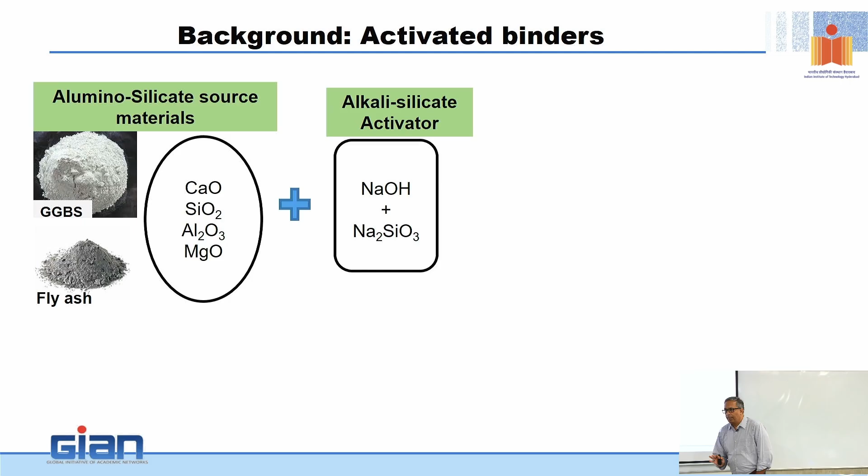Now, what is the outcome of this process? Well, if I use either a fly ash or a slag, I would form one of these two binders here - that is calcium aluminosilicate hydrate or sodium aluminosilicate.

It's not a hydrate, it's a misnomer. But somehow this name NASH has stuck because of a fortunate or an unfortunate accident that happened in a committee. And that name has since persisted.

So, but at the outset, I want to clarify one thing. People use this term geopolymers rather loosely. Now, what are geopolymers? Geopolymers, by the strictest definition, are these sodium aluminosilicates. Now, when you start forming calcium aluminosilicate, when does calcium aluminosilicate hydrate or CASH form?

When you start with a calcium-rich source, like say GGBS, and you were to alkali activate it, what you may form is a CASH. Now CASH is like a distant cousin of CSH. Therefore calling it a geopolymer is a misnomer, right?

So please be careful. And I know people use it colloquially and it's rather a catchy word. So everybody throws around the term geopolymer, but not all alkali activated materials produce geopolymers. Now, if you really want a geopolymer, you should basically drop a source that has calcium in it. You go with a calcium deficient source.

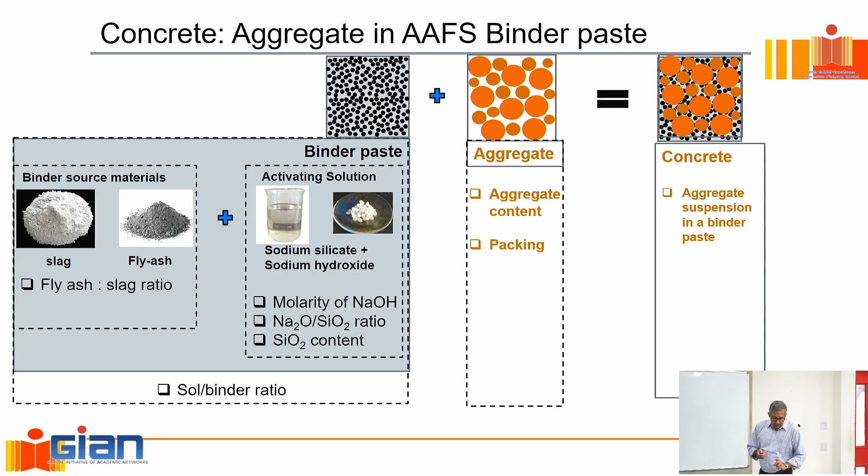Now, the first thing is, why do we add this sodium silicate, and what does it bring into the picture? Well, if you look at fly ash and slag, these are my source materials - they're bringing in silica, but there's not adequate silica, so to supplement it, I add sodium silicate. Now, what happens when I increase the silicate content? Silicate content is the amount of silica present in the solution made up of these two.

If I increase the silica content, typically my strength starts shooting up because I'm bringing in more silica that helps formation of either C-A-S-H or N-A-S-H, and that leads to strength improvement. So having silica in the solution is almost a must if you really want good strength from the material. Only in rare cases where we are dealing with only slag do we sometimes drop sodium silicate. Otherwise, typically almost always you'll have to have that.

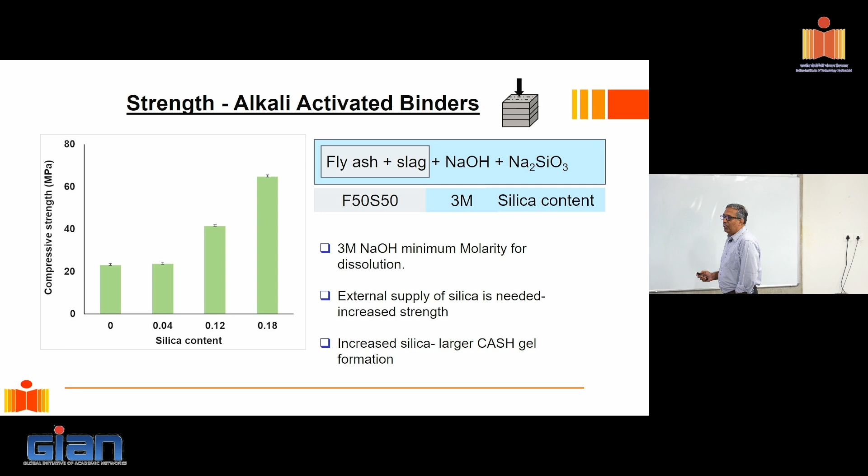And when you do that, this proportion of these two matters - how much water I add controls the molarity, and the percentage weight of this to these two is another variable that I have to worry about.

Now, coming to the rheology, going back to the basics again. If we do the rheology, we'll stick to the standard test, a constant shear rate test - and yesterday you saw how to measure thixotropy. What we would do is basically do a ramp up, so we are ramping up in strain rate, hold the strain rate constant for some time.

What do we hope to achieve here? Basically smash the internal structure, complete whatever deflocculation we can achieve, and then ramp down and see what state we are left with. What do I expect to get when I do the ramp up? Because this has a yield stress, it will start flowing only after I overcome this - a shear thinning liquid. This is during the equilibrium part where I'm holding the strain rate constant. What happens here? The structure breaks down, so the stress resistance starts decreasing.

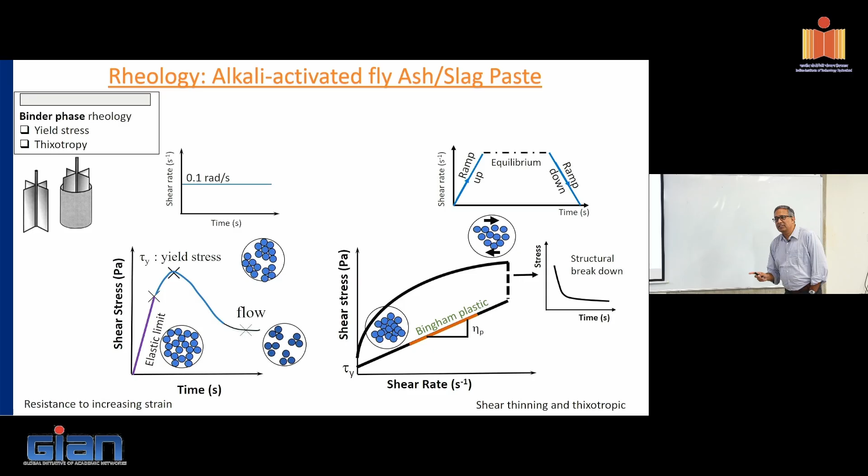And then when I ramp down, I basically come down here, and usually the ramp down is a Bingham plastic. This is what we get for cement paste. But if you look at what I get for these materials, here I'm doing a slightly different test where I'm doing a ramp up and a ramp down. This was also discussed yesterday using a vane setup.

So this is what you typically get for cement. You see this is during the ramp up and this is during the ramp down, and it's a pretty steep ramp down, a very straight line. So basically this is a very good approximation of Bingham plastic - you've already seen Bingham plastic. If you look at the ramp down curve here, it's pretty straight. If you project it back, there's a little bit of nonlinearity here, but that's something we can ignore.

So when you look at cement paste doing the ramp up and ramp down experiment, it basically behaves like a Bingham plastic. But if I take one of these alkali activated materials where I have 50% fly ash and 50% slag, and a solution to binder ratio of 0.39 - that is, 61% of this is solids, fly ash and slag in a 50-50 proportion, and 39% of the paste is activating solution. What is the activating solution made up of? It's a combination of sodium hydroxide and sodium silicate, such that I get a silica content of about 0.09, meaning 9% of the solution is dissolved silica.

Now, what do we notice from the alkali activated material? Well, this is a ramp up curve and this is a ramp down curve. The ramp down is fairly linear, except you see what happens here, right?

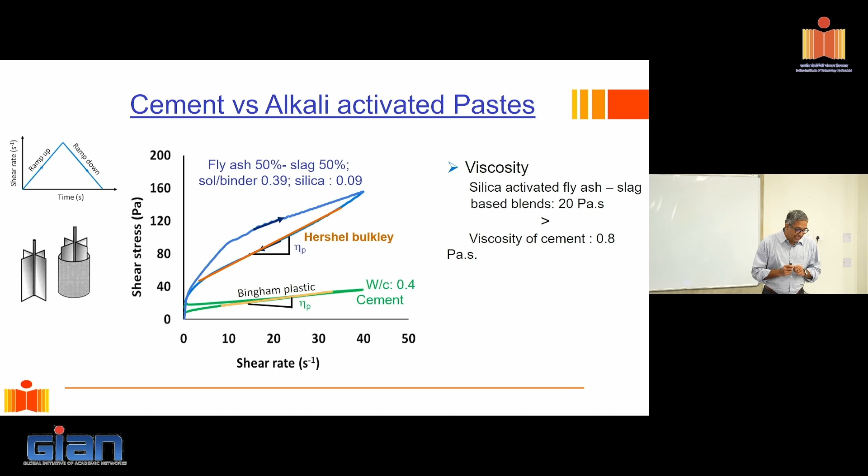Now, there's also something very interesting about silica. When you actually add silica into water, its state and shape depends upon two things. And one of the primary variables that controls the shape and the state it's present in is the MS. This is silica to sodium ratio in the solution.

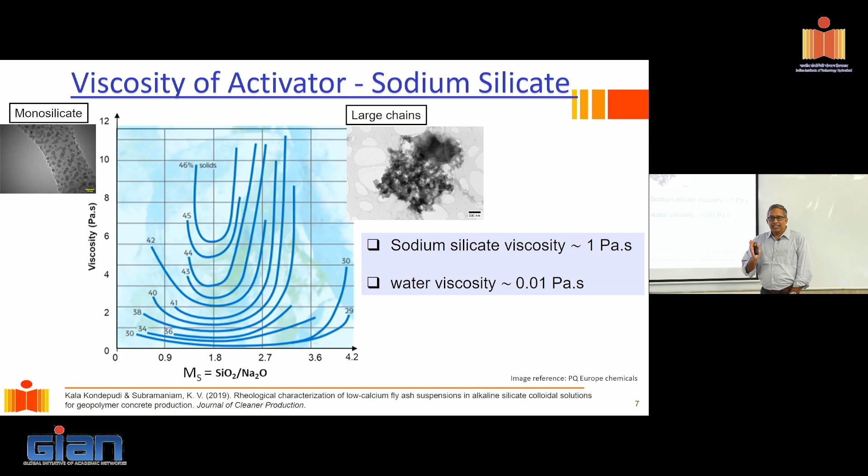Where do I get this from? My activating solution is a combination of sodium hydroxide and sodium silicate. Sodium silicate brings in the silica. And the sodium hydroxide and the sodium silicate bring in the Na2O. So in the activating solution, I get this ratio forming there, the silica to sodium ratio. We call this the molar ratio or the silica ratio. There are different terms that are used. But in short form, we typically just call it MS.

Now, this is the viscosity of a solution for different silica contents. Each of these lines is for different silica contents. If I take a line like this, this has 46% by weight of the solution in dissolved silica. Whereas this, by the time you come down here, has 30% of the total weight of the solution in dissolved silica. Now, you may be wondering, why would I want to dissolve silica in a solution?

Well, if you look at most commercial solutions, including paints, all of those contain dissolved silica. And it is needed or it's used typically as a viscosity regulator in a lot of these applications, including some cough syrups. So basically, what do I use silica for? For regulating the viscosity.

Now, once I decide on a certain silica content, if I vary the MS, notice what happens to the viscosity. The viscosity first decreases and then it increases. The reason that happens is when the MS is very low, basically silica exists in monomeric forms. It is very close to monomeric or dimeric forms. It has not polymerized yet.

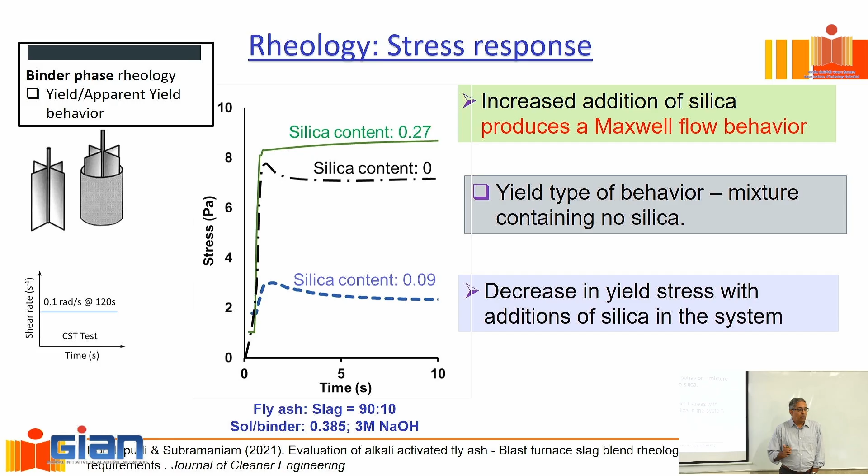Now, what is Maxwell flow and how is it different?

Sodium silicate, I would be adding more silicate. That's how I increase my silica concentration in the solution.

If I do this constant strain rate experiment again, this is what we said is a yield type behavior. I go from step 1 to step 2, where the material yields and then starts to flow. But look at what happens in the Maxwell behavior: the resistance continuously builds up to the peak and then stays constant.

Now, if I was to idealize the yield type behavior, this is how we would idealize it. Basically you would use a Kelvin type model where you have a dashpot in series with a spring, and then another spring shunted in parallel with this. So what happens if I pull this setup? At some point this spring breaks and then it continues to flow. This initial spring represents that percolated network I have here that gives that resistance.

Once I shear it off, it starts to flow, because if this spring were to break and I was to pull on it, the viscous damper and the spring are the only two mechanisms giving me resistance. Primarily the resistance is coming from the viscous part. So that is what we call a Kelvin model of a viscoelastic solid, which flows if this spring were to break. Breaking of the spring is basically my peak here, the maximum resistance that I get.

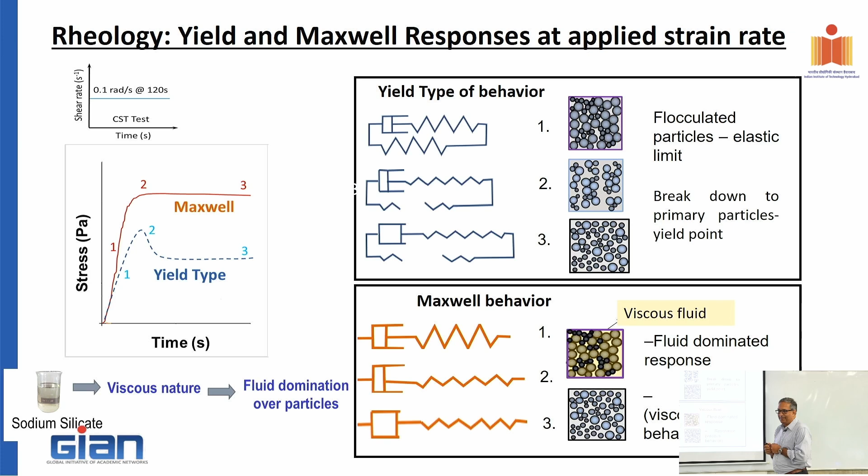I'll show you what happens when we add more and more silica into the solution, what we measure typically is the state of flocculation, how much particles are flocculated. We measure this thing called the zeta potential, which tells you how likely it is that these particles will agglomerate. If the zeta potential is negative, more and more negative, you will see particles in an individually dispersed state. Whereas if the zeta potential starts going towards zero, the chances of flocculation are very high.

Suppose I take cement, put it in water, and measure the zeta potential. If I measure a very high negative zeta potential, individual cement grains will be floating around as individual grains. But if the zeta potential is low or close to zero, the tendency for the cement grains to agglomerate is very high. So what does a surfactant do when you put it into a solution? It basically lowers the zeta potential, another way of saying I'm dispersing the cement particles.

That's for cement. Now, what happens when I actually increase the silica content in these solutions? I find that the zeta potential, which I measure for fly ash or slag put in that solution containing silica, becomes more negative.

That means these particles tend to separate out, and that is where I get into this problem. The issue is that if I look at individual particles of, let's say, fly ash—and this is actually a very good approximation for fly ash, because fly ash particles are nearly spherical, right? They get coated with this solution.

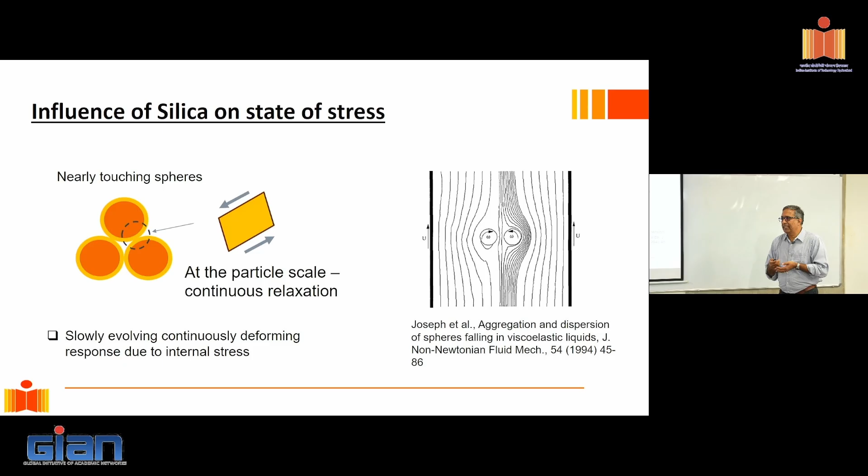What would happen now? This fluid which is in this gap here is going to continuously deform. We just saw that. So what will happen? It will basically continue to deform and lose its shape. It will continue to flow. This is one of the first problems we encountered when we were looking at alkali activated materials.

Let me show you how the rheological behavior of this alkali activated material looks like. Here what we're doing is taking fly ash and slag 50 to 50. Solution to binder is 0.35, 3 molar sodium hydroxide and 0.9% silica content. This is the composition of the activating solution. This is the mass proportion of solution and binder, equivalent to a water to cement ratio of 0.335. My binder is made up of fly ash and slag in 50-50 mass proportions.

Now I'm doing a constant strain rate experiment—basically shearing it off. When I shear it off fast, look what you get. You get a yield type behavior. Look at this, it basically builds up very quickly to the peak and then it decreases, right?

What happens when I slow down the rate? So when I start slowing down the rate, you see what happens? When you go to a very slow rate like 0.001 radians per second—basically turning the spindle at a very low rate—what's happening? You see that the resistance slowly builds up. Okay, why is that happening?

So what is the fundamental difference between these three curves? It's the rate at which I'm loading, right? Which means the viscosity, the viscous solution that I'm dealing with, the activating solution, that dominates. It tells me how it is going to deform. If I load it fast, I'll get a yield type response. If I load it slowly, I'll get a Maxwell type response.

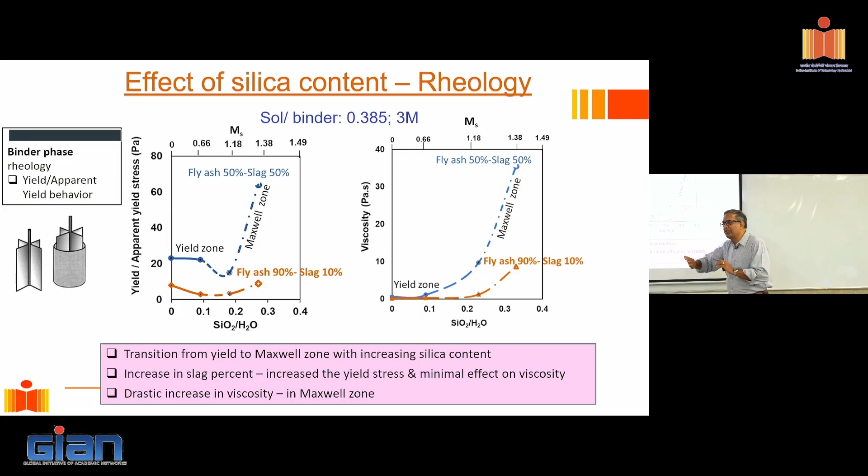If you hold the stress constant, it will continue to deform—I'll just show you that. When doing these rheological experiments, we are applying a constant strain rate; we are not pausing anywhere. But suppose I was to pause it here—you'll see that it will continue to deform slowly. That is what we notice typically in these Maxwell type responses.

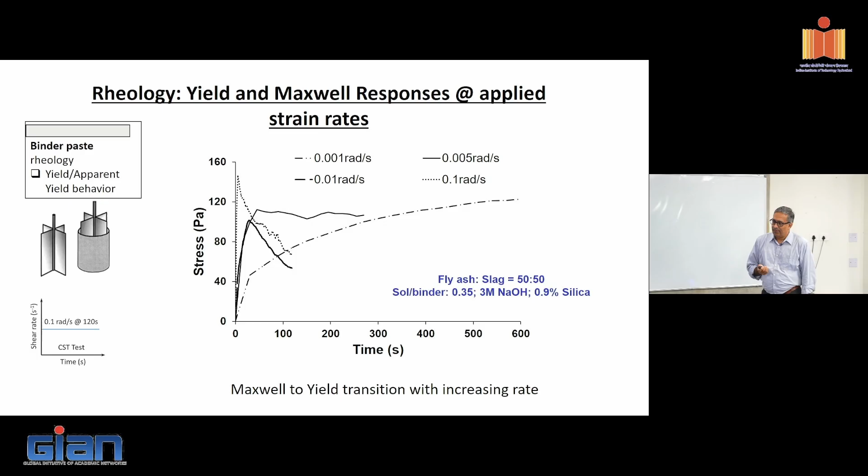The other issue we have is this. Now, you've had this class on thixotropy. How do we measure thixotropy? We basically ramp it up, hold it constant, ramp it down, take a small break, and then do another ramp up, ramp down. So what we're showing here is the first ramp up, hold constant, ramp down, and then subsequent ramp cycles. You see that nothing much changes, even if I give a 5-minute or 10-minute break.

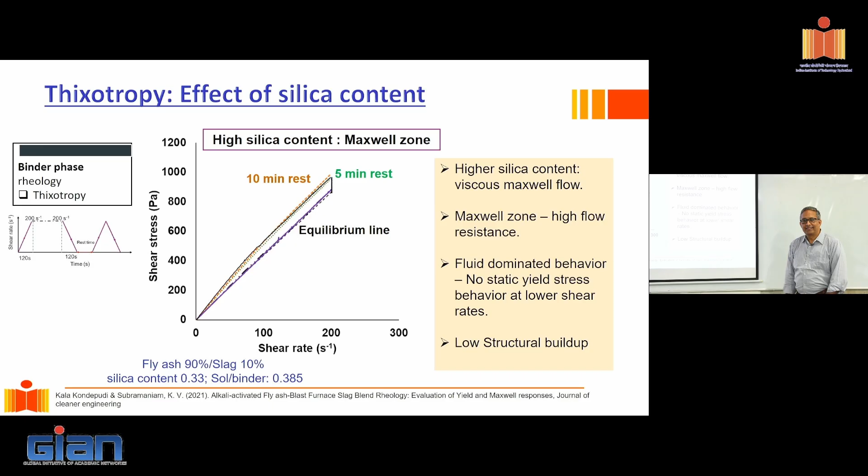What that means is the internal structuration is extremely slow. It is not going to structurate from the inside. I have to help it. Otherwise, I'm dealing with a Maxwell type fluid, which is going to continue to deform, and it's not building on the inside. So if I was to take one layer and put another layer on it, it'll just go. That's what's going to happen here.

Now, the rate at which the internal structure builds, I think this was introduced yesterday, we call it SRE, structural rate of equilibration. We do these experiments and measure the area under the ramp up, ramp down curve, and you find that yes, the SRE does build up. But notice this: whatever I measure as the SRE is the energy that would be required to shear off a structure. Where is that energy going? If a material structurates, it would take up more energy.

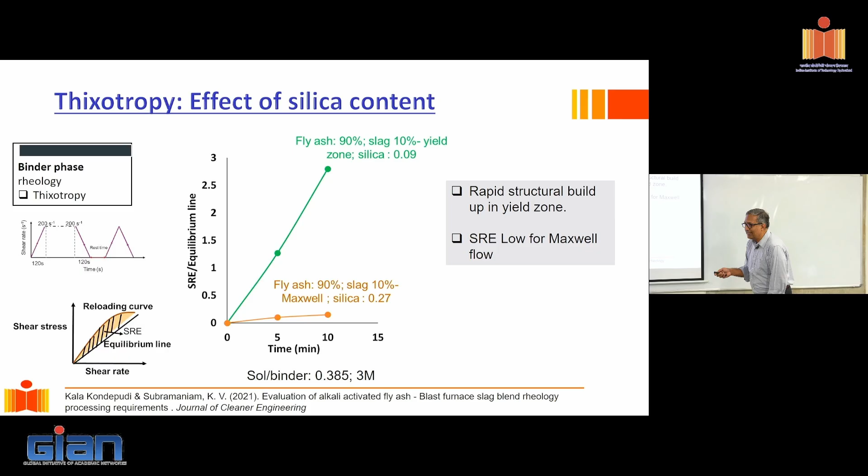What we are measuring here, the 0 point, is after I smash the structure. So after I've done this, I wait for some time and then do a ramp up, ramp down. I get a curve like this and measure the area in between, which gives me the energy required to break the structure after it restructurates. What do I mean by that? We go through this: I ramp it up to a certain rate, hold the rate constant, completely smash the structure, ramp it down, then hold it constant for some time, and then do a ramp up, ramp down. What I'm showing here is the ramp up, ramp down data after I've done this, where I've completely smashed the structure. Now, this area between is basically the energy it would take to break the structure which has been smashed. So it gives me an idea of restructuration happening inside the fluid.

So this SRE that I measure with different time intervals - if I increase this interval, what's going to happen? I expect structuration to increase. So we measured the structuration in a mixture with fly ash and slag at 90 and 10, with 9% silica and 27% silica. What do you notice as the difference here?

At 0, both are similar, which is basically where I am down. I wait for 5 minutes. This fellow doesn't structurate enough, whereas this fellow is structurating. If you look at 10 minutes, this fellow is still not structurating enough, but this fellow is. So if I was to print with this fellow with high silica content, what would happen?

Remember, this stage represents what's happening during pumping, when it's going through the pipe and the nozzle, it's getting sheared very much. Then this rest time is the time the layer sits idle before the next layer comes on. Before the next layer comes on, I expect the structuration happening should be rapid enough that it can take the next layer on, isn't it? If I was to print with this fellow, what's happening? It's hardly structurating. So if I put the next layer on it, it'll simply lose its shape and even collapse.

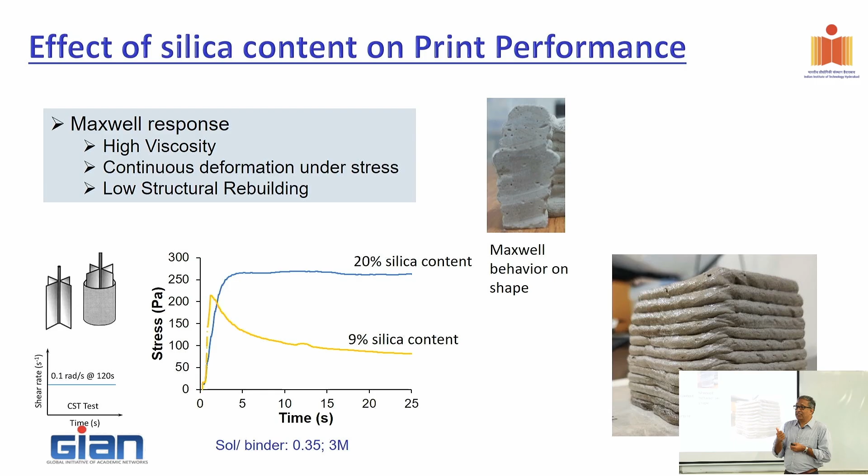So how do I help this? I have problems with high viscosity, right? I can't do much about it, I just pray that my pump can take the pressure. But if I don't help it structure, I have a problem. Where do I have problem with structuration? Wherever it starts getting into a Maxwell type behavior is where the structuration becomes a problem.

When do I get into a Maxwell type behavior? When I add a lot of silica in it. Why do I need to add silica into the solution? For strength. So it's like a full circle, right?

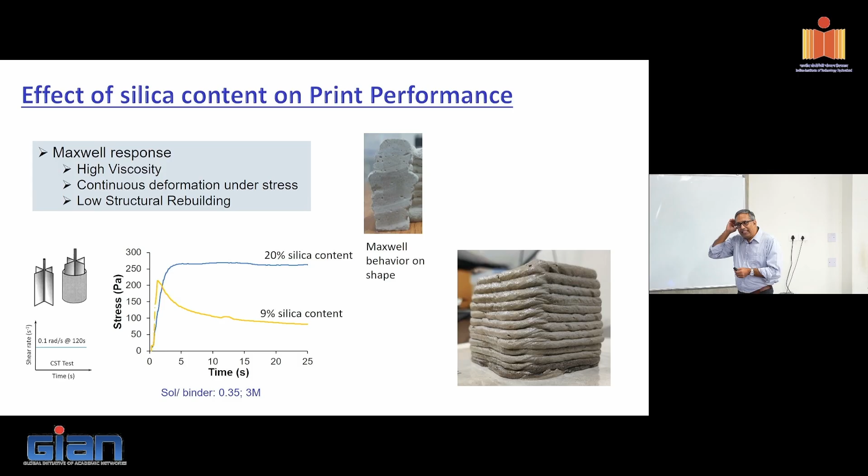Remember the levers we had when doing concrete mix design? We had the basic things I could control, but then we had these admixtures - that was my final lever. Can I put something in there that will help me with structuration?

What we found is that if we start adding clay into the material - what are we doing with clay? We are basically relying on the clay to give me the structure. I'm not adding clay to the extent of producing LC3 cement, just a small amount. In fact, initially we started with nano clay and we were adding it at about 0.35%.

What is the beauty of clay? Clay is a wonderfully thixotropic material. What do you expect when you deal with a clay slurry? When you smash it, when you shear it off very fast, the structure breaks. Initially you have big clumps of clay that come together. If you shear it fast enough, these will break up into individual particles.

Then if you let it sit, what happens? Clay has a tendency to agglomerate. It will again form those clumps and start structurating on the inside. You can form these beautiful skeletons inside the solid. And that's what we're relying on this clay for.

So adding a small amount of nano clay, look what happened here. I had 0% silica, 6% of silica, and I started seeing this Maxwell type behavior - the problem is it's not structurating, it will not keep its shape. Just a little bit of nano clay, I start getting back my yield type behavior. The yield stress has increased like I wanted.

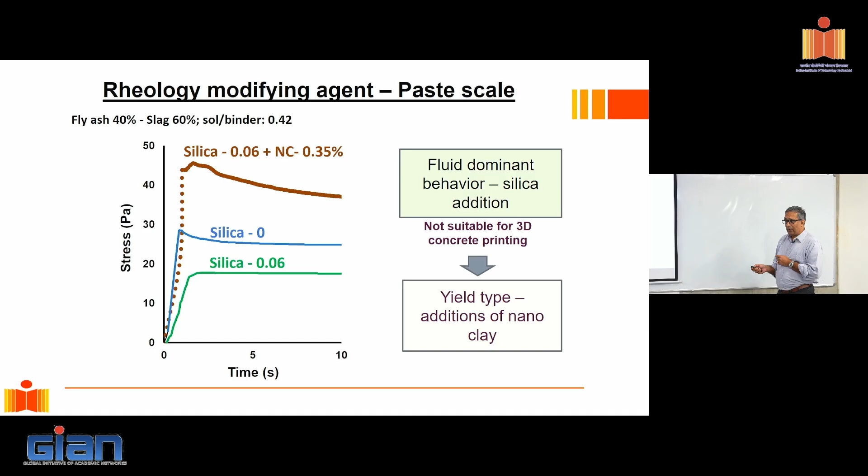And in fact, even the thixotropic measurements, which I'll show you in the next slide, also start improving. This is also a measure of modulus, which presents the stiffness of the material. Why is stiffness important? It controls the deformation. So what happens when I add clay into this material? My stiffness buildup happens much quicker and it's able to keep its shape - it doesn't deform that much.

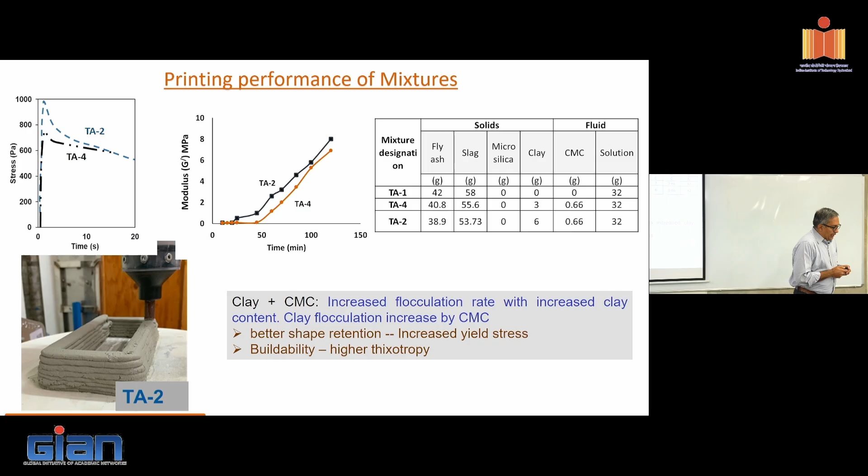With that, we were able to produce 3D printed concrete panels by controlling the rheology of the alkali activated binder. If you don't control the rheology, you run into one problem or the other - a few things you can control, a few things you cannot. If you give me an alkali activated material which has sodium hydroxide and sodium silicate in it, expect it to be more viscous than cement paste.

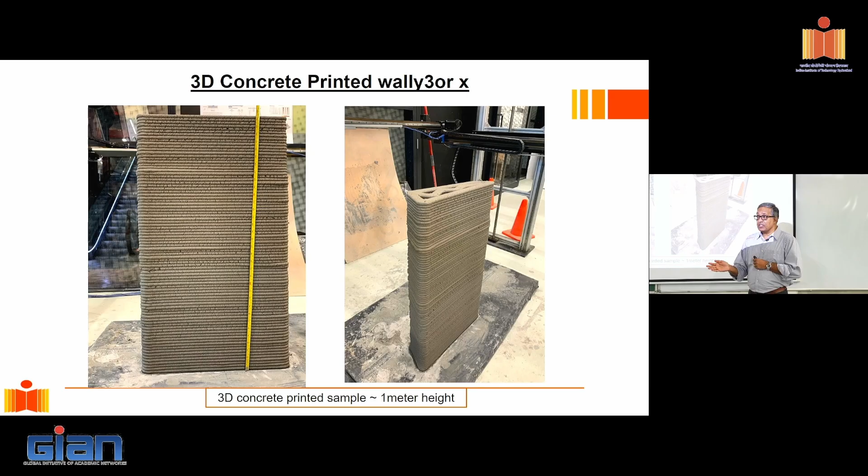It will be. How much more viscous? By 2 orders of magnitude, which means it is going to be much more viscous than water. Why? Viscosity of water is 1 centipoise. Viscosity of an alkali activated paste is at the very least 1 poise. So big difference, huge difference. You expect alkali activated concrete to be much more viscous.

What is fundamentally different is the way this alkali activated binder paste would behave when you shear it. Now, what changes its behavior is all the silica that is present in the activating solution. Why do I need silica? I need silica to control my strength.

If you're lucky and dealing with a source material which has highly reactive silica in large content, then you don't have to bring in additional silica from the outside - then you can just work with this as if you're working with cement paste, and half your problems are solved. But the minute you have to dose external silica, usually that's brought in the form of sodium silicate. Now the question may be: why sodium silicate, why not nanosilica? Well, you could add nanosilica as well, except it's much more expensive.

Water glass is much cheaper, and if you really want to scale up, nanosilica is not your alternative for adding in large quantity. Whereas water glass is available in large quantity, it's industrially produced, it goes into making soaps, so it's available and you can source it in large quantity. You can think of scale up, and therefore sodium silicate is almost always used.

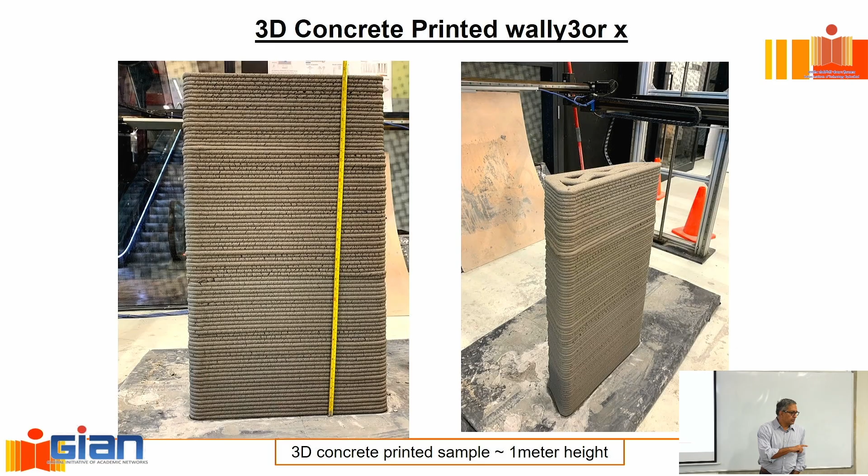Now, what sodium helps me do is also control the size of this silica particle. But that brings about a lot of complications. My variables, when I'm dealing with this, are much, much more complex.

So, is there a one size fits all for alkali activated binders? No. You need to understand the rheology of the binder paste: how much silica content do you have in your solution, what is the MS, this ratio of the solution, and what is the solids to activating solution mass ratio.

Understand that adding more silica will make the solution more viscous, with a likelihood of it becoming a Maxwell flow. If it becomes a Maxwell flow, good luck with the structuration — it's not going to structure, it will not have an internal structure, it will just keep deforming. Which means you have to bring in external additional agents to help it structure.

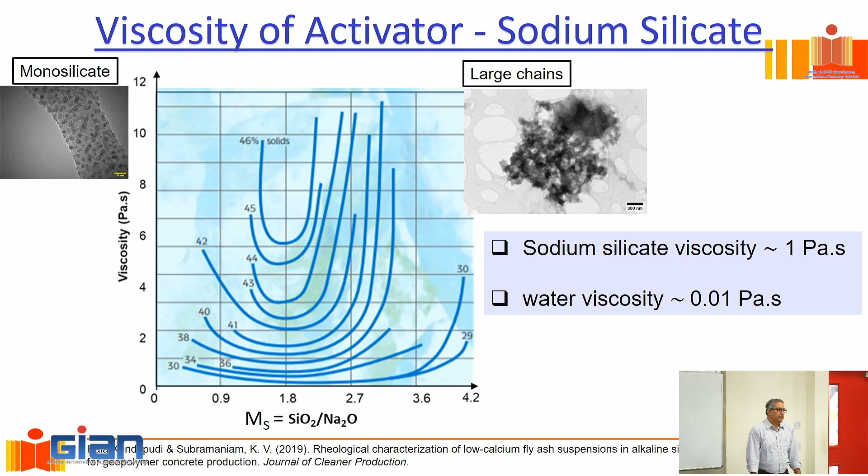The most expensive ingredients in alkali activated materials would be sodium silicate and sodium hydroxide. But if you look at just the cost of these, it works out lower. The biggest cost is usually the binder material, and that varies with the country. In India, we have plenty of fly ash, so that cost almost goes to zero, though it's starting to increase because cement companies are bidding for fly ash. But if we set that to zero, it's a win-win - I'm only paying for sodium hydroxide and sodium silicate. The sodium silicate doesn't have to be lab grade, it can be industry grade, so costs come down significantly. Same with sodium hydroxide. I don't have the exact number, but yes, it does work out lower.

Zeta potential - suppose you take a suspension of solids, like colloids, which have a tendency to stick together. How do you determine whether it will stay in a flocculated state or a separated state? There's a measure called zeta potential. It's basically a measure of the surface charges on these particles. Loosely speaking, if your zeta potential happens to be very negative, the particles will tend to repel each other. They will not stick together - it will be in a dispersed state. When the value of zeta potential is negative, it will stay in a highly dispersed state.

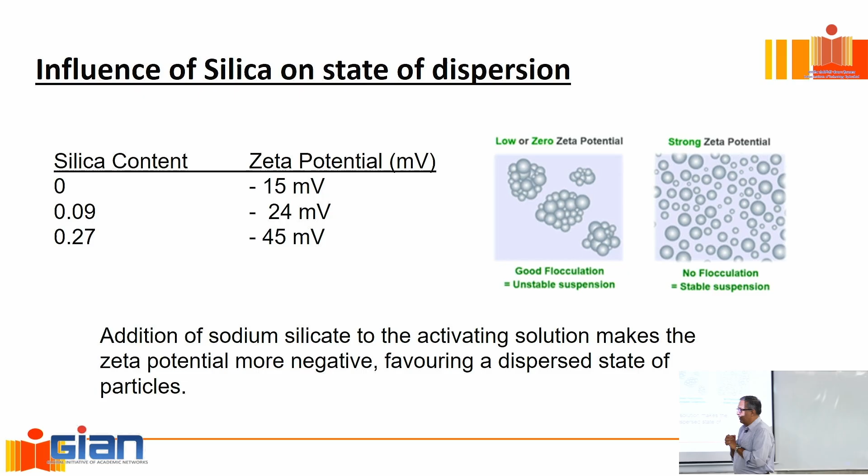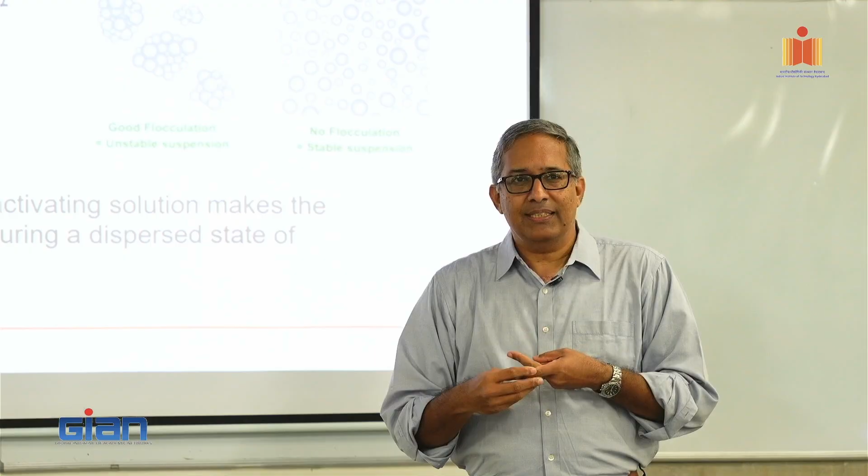Beautiful question. It depends on which binder you're using. If you are producing geopolymers, which is sodium aluminosilicate, called NaSH - if you're producing NaSH, it's all a game of alumina. The maximum strength you can get depends upon the alumina present. We don't even bother about the silica, we just manage the ratio of alumina to silica. If you're producing CASH, alumina becomes like the poor second cousin - it's all a game of silica. So it depends on the binder you're producing, and what controls that is the ratio of fly ash to slag. If zero slag, I'm producing NaSH, then it's all a game of alumina. If it's 100% slag, it's all CASH, no NaSH, then it's all a game of silica that primarily determines the strength. CASH is structurally very similar to CSH - it has the same calcium backbone and silica tetrahedra attached to the calcium, with alumina kind of breaking that chain.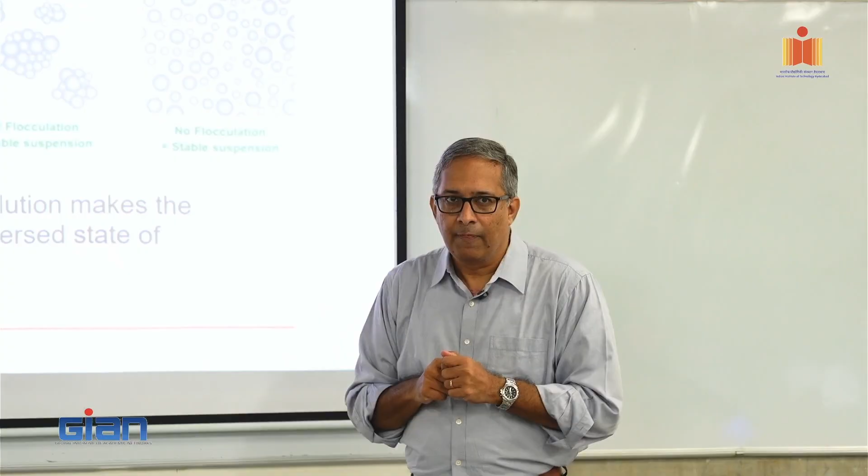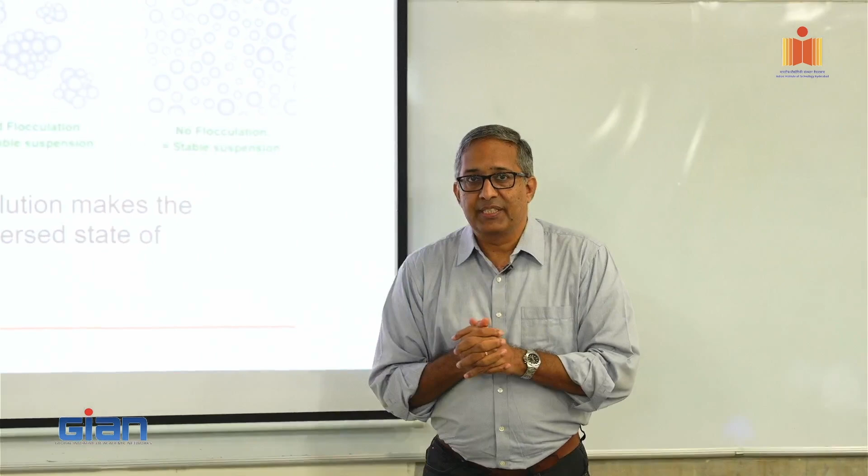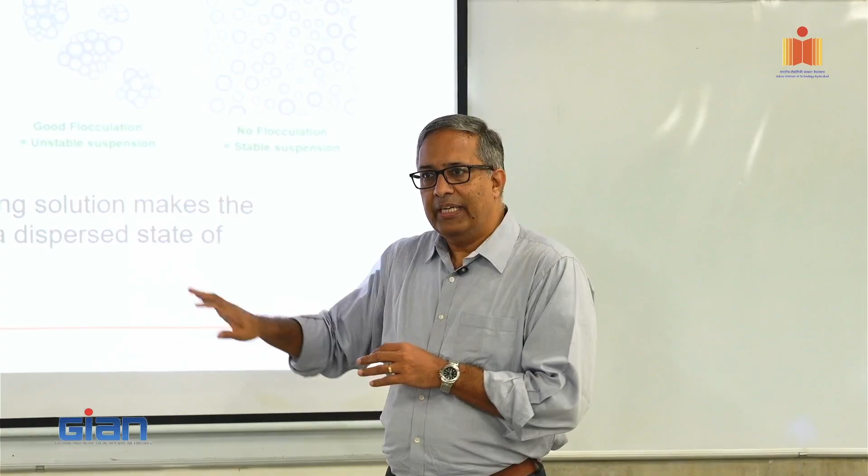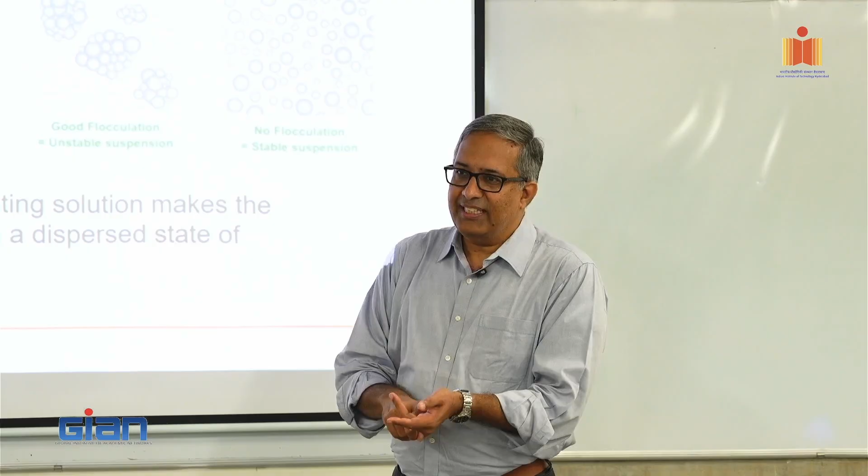Let me get to this question as well. When we started doing our work on geopolymers, we found that everybody was using sodium hydroxide willy-nilly - 8 molar, 14 molar. When we tried to mix that in our lab, my students complained they were going blind, it was so pungent they couldn't even stand there. Then we started getting into why we really need that higher molarity, and we found that actually 3 molar sodium hydroxide is adequate. Why 3 molar? We've done studies that show if you keep molarity at 3 and higher, the glassy phase of fly ash dissolves completely at about 3 molar concentration of sodium. You don't really need more. So in all of our studies, we try to maintain 3 molar, we don't go higher. You can go higher, but that higher molarity really isn't helping you - you're just paying for the excess sodium hydroxide. If you keep it around 3, it's adequate. Your glass will dissolve and you'll get your N-A-S-H formation happening.

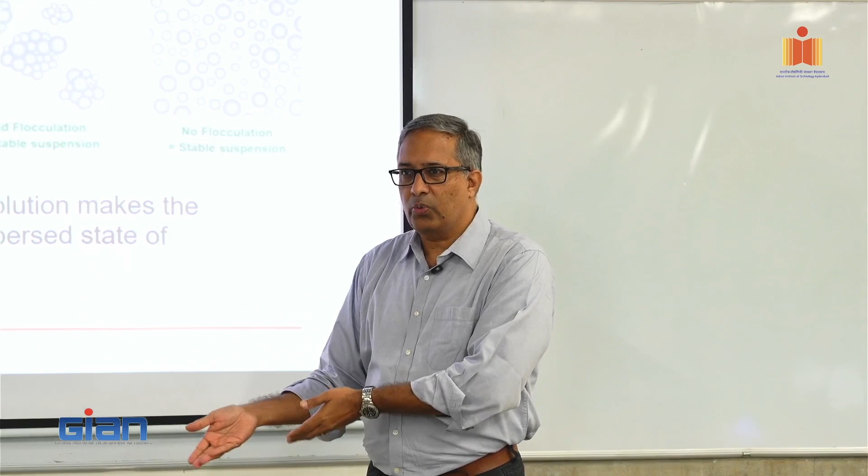Now, when you're talking about slag only, there you don't even need a high molarity. It'll react even in water, just a little slow. So what does the sodium hydroxide do? It basically kickstarts the dissolution - you get a faster dissolution and hence a faster reaction.

You'll have to establish how reactive your silica is in these materials. If it's sitting in a glassy form that is not very reactive, you'll have to go higher in molarity, not pH. Right? Yes.

What's your opinion on the transportation? Yeah, this is always an issue. There are always naysayers. If you pitch something, they'll say, 'Oh yes, but.' So there are always issues with all of these materials. One thing people say is, how do you transport the alkalis? Where do you store them? How do I mix them? Isn't it unsafe because it's highly caustic and this and that?

Yes. Now, the solution for that is what I presented overall here, what we typically call a two-part geopolymer, where they're mixed separately. The solution is mixed separately, the binder is brought, and then we mix it. But now we are trying to develop a one-part geopolymer, where the geopolymer powder comes in a bag, where we pre-blend sodium hydroxide in powder form, pre-blend sodium silicate, which is also in solid form as a metasilicate, and then all you do is add water. So the process is no different from cement paste, except it's much more alkaline, right? It's like any other industrial product then, right?

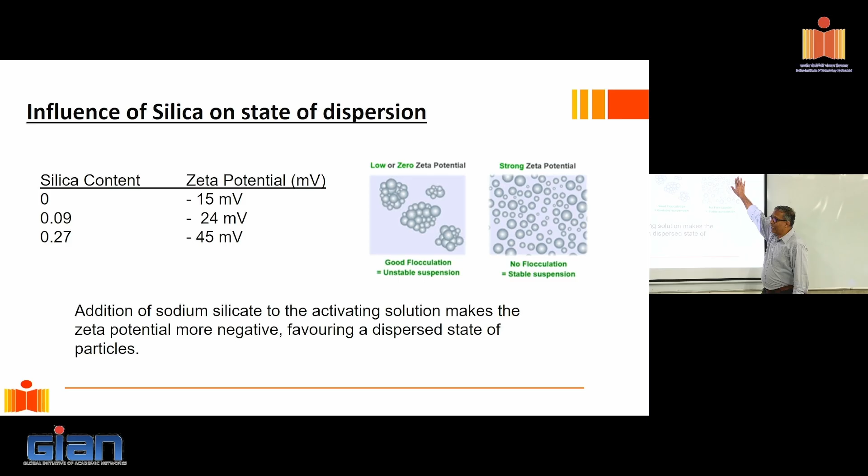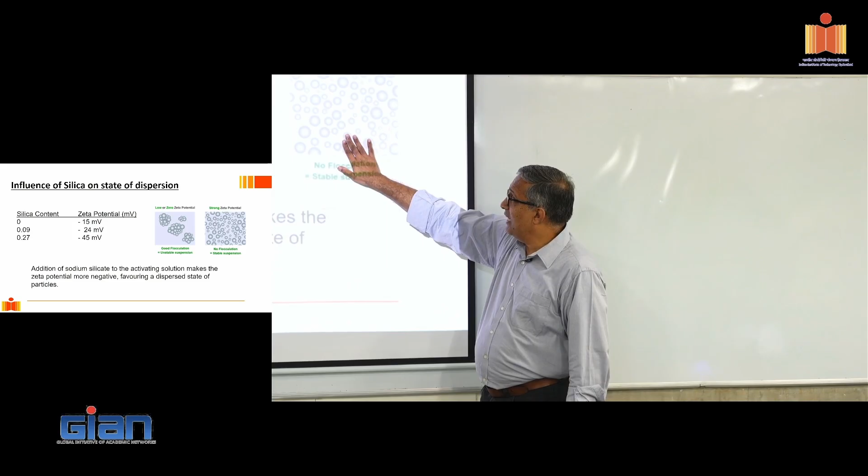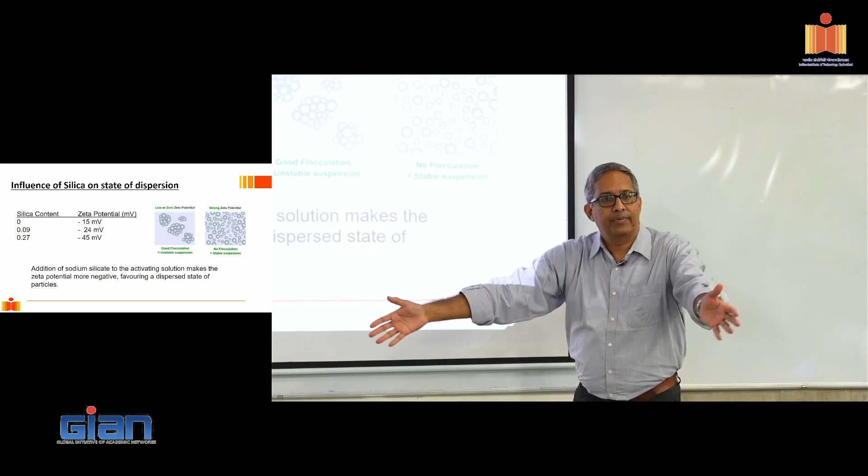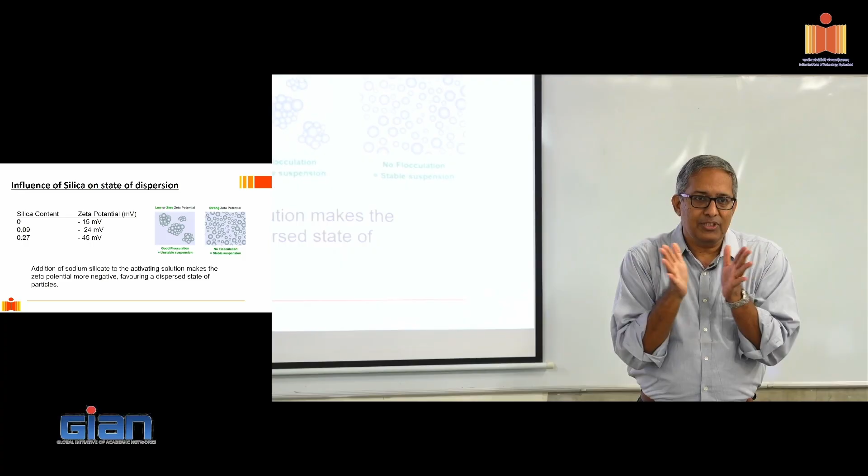So what we said is, look, I'm not even going to worry about this. What will I do? I'll bring in additional material which loves to structure, which is the clays we brought in. This can happen in extrusion also, where we extrude this sample. So if I try to get this fellow to structure, this is fly ash sitting in a sodium hydroxide, sodium silicate solution, and the particles are just sitting separate. They won't come together, they won't structure, which means if you actually extrude, it'll just spread out. That means I cannot rely on this fellow to structure. So you have to bring in another material which loves to structure and gets them to stick together. And that's where we brought in the clay to help us out with the structuration.

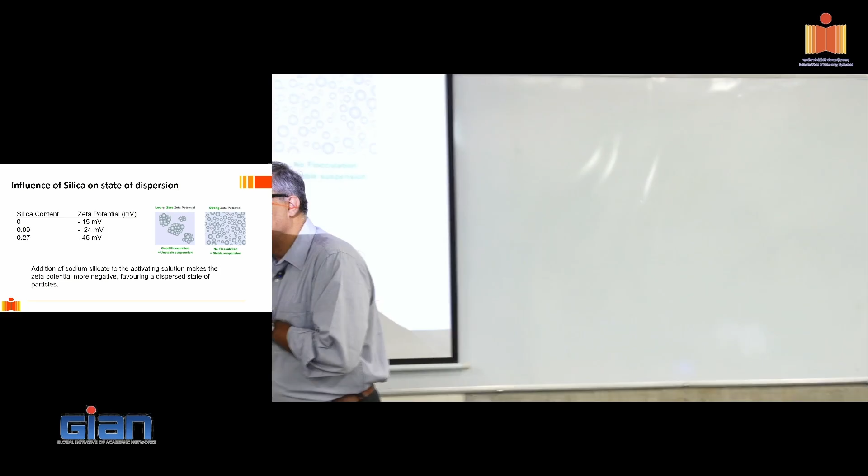Oh yeah, so silica content, remember when we talked about packing? Go back to our basic definition of concrete. Where was that?

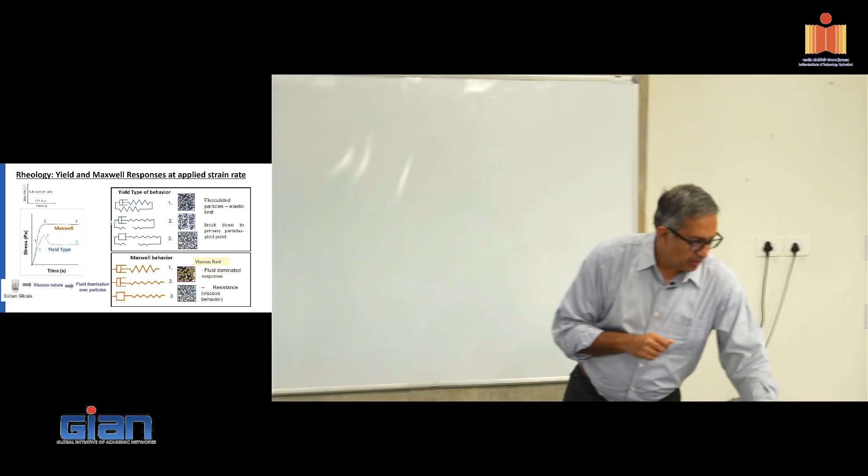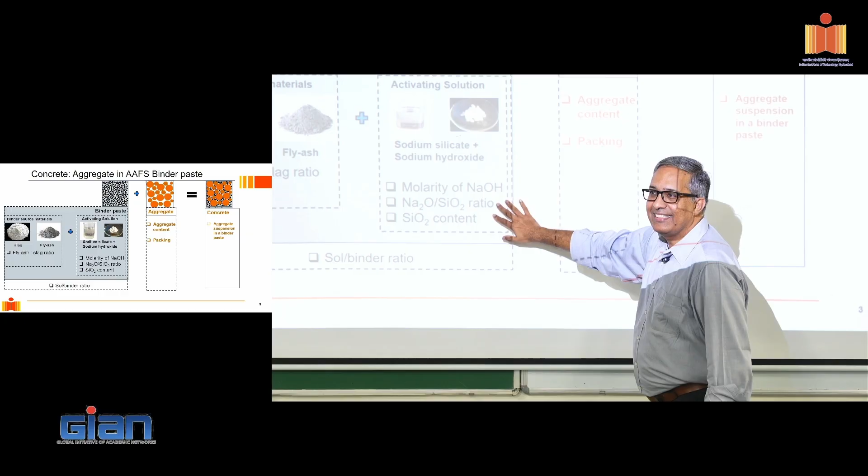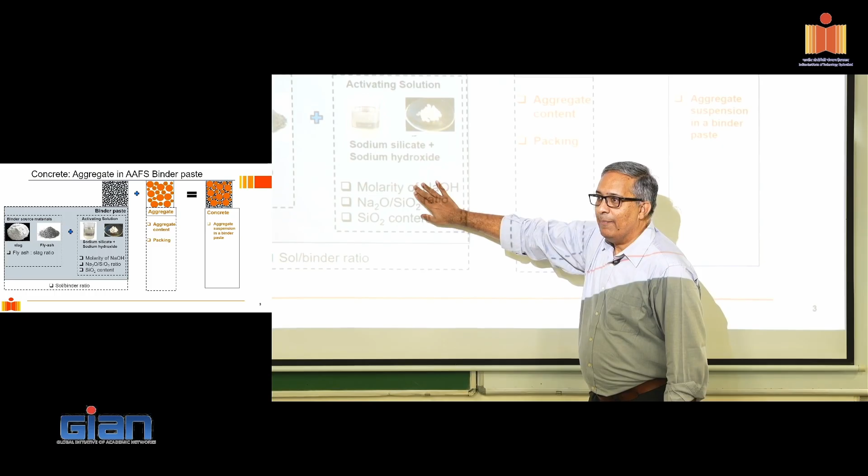Yeah, this one, right? Silica is sitting here, packing is happening here. Two very separate scales, isn't it? So packing I'm worried about here. Once I get into concrete, this fellow—and yesterday we spent a lot of time on this. Today I focused on this, and the impact of this on this, which is the concrete.

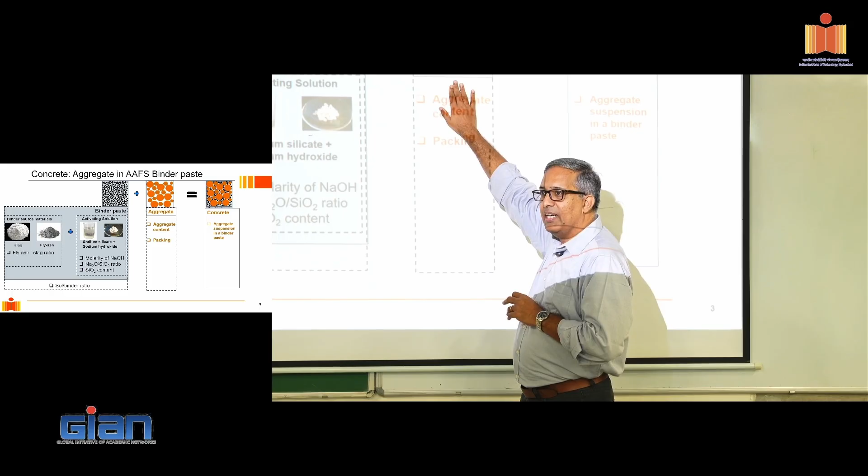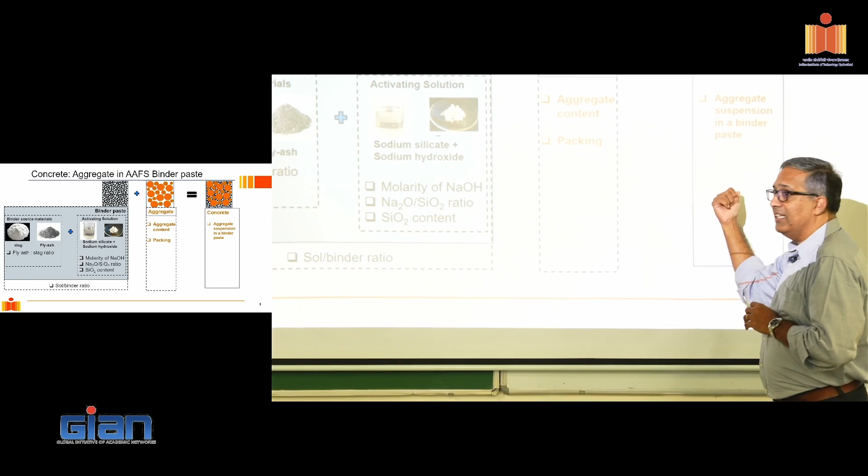Of what? Packing efficiency is not affected by this, right? It's like two independent probabilities. This fellow doesn't know what this fellow is doing unless they come together. So the packing efficiency is controlled by what you give me as aggregate. I'll play around with that and get you a nice packing efficiency, at this scale of the divide. So this fellow doesn't know what is coming here, but they come together here, and then it starts behaving like a composite material, the concrete that we know.

Yes, but why would you? You can, but why would you? I mean, you can, but then the whole chemistry changes. So typically we don't bring that in. There are a few people looking at it, again, if you are after C-A-S-H, then perhaps cement may help. But if I'm after N-A-S-H, why would I want to add cement? It'll completely ruin my chemistry. All right, so I'm going to stop here.